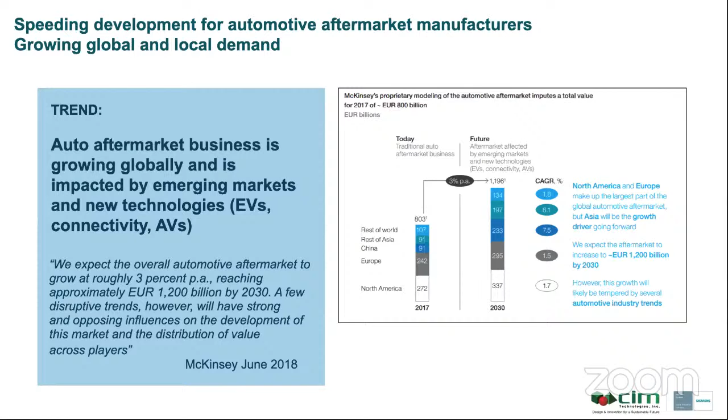The first trend we will discuss is the growing global and local demand for automotive aftermarket parts. The population of cars in use globally is growing, and the number of model types and average age is also growing. However, the profile varies significantly around the world, with China having a higher rate of growth and a lower average vehicle age, for example.

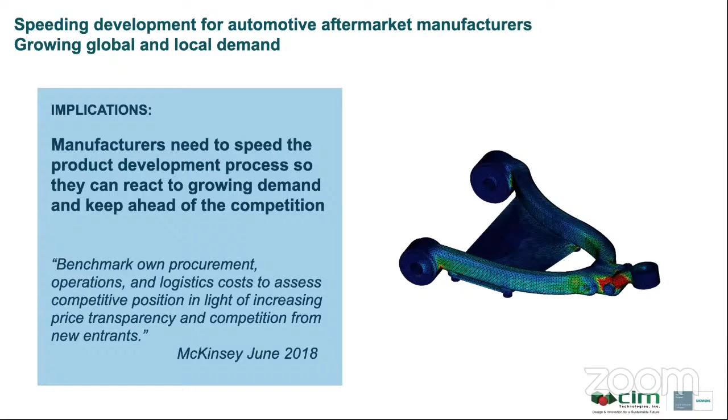One implication of this trend is that automotive aftermarket manufacturers will need to speed their product development process so they can react to growing demand and keep ahead of the competition. A possible solution for these manufacturers is to implement an integrated solution for product development that creates a digital twin of the product, adds data, and leverages this data throughout the product lifecycle. The digital twin can be used to optimize both the final product and the product development lifecycle.

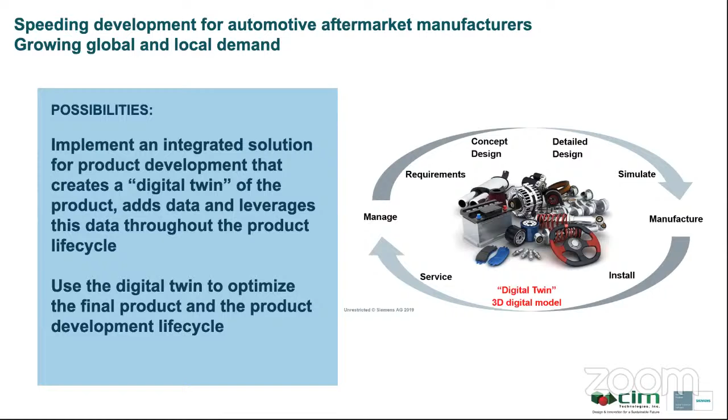The second trend that we will discuss is increasing demand for custom products that meet individual customer needs.

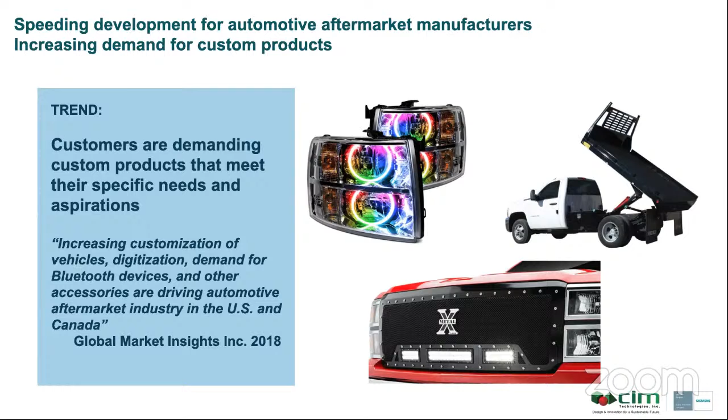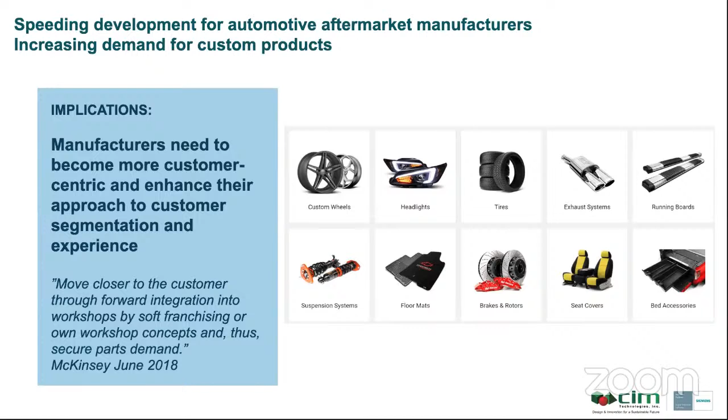An implication of this trend is that manufacturers need to become more customer centric and enhance their approach to customer segmentation and experience. A possible solution to this challenge is to develop a more flexible product development process that can easily create multiple options and variants of standard products.

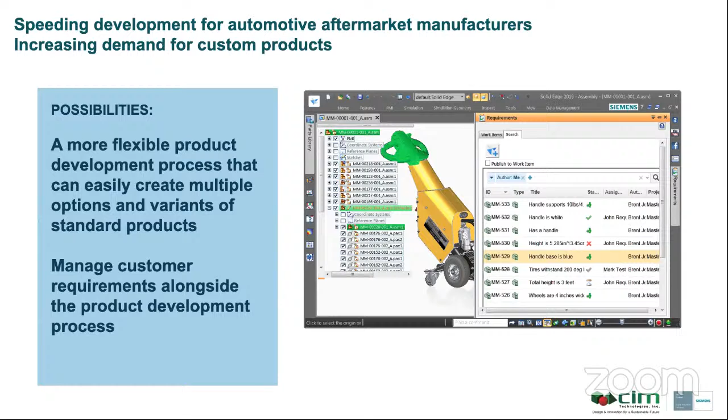Also, managing customer requirements alongside the product development process can help manufacturers react to customer demands more effectively. In addition, the ability to quickly create photorealistic renderings and animations of products to support sales and marketing becomes more important, together with the ability to supply data and product images to populate online catalogs.

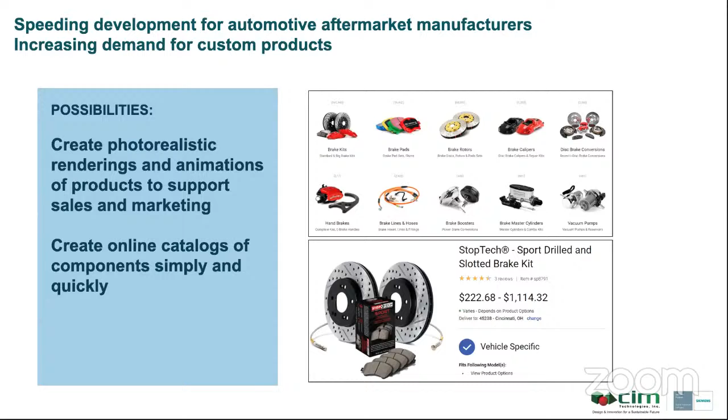Now let's go to the last trend.

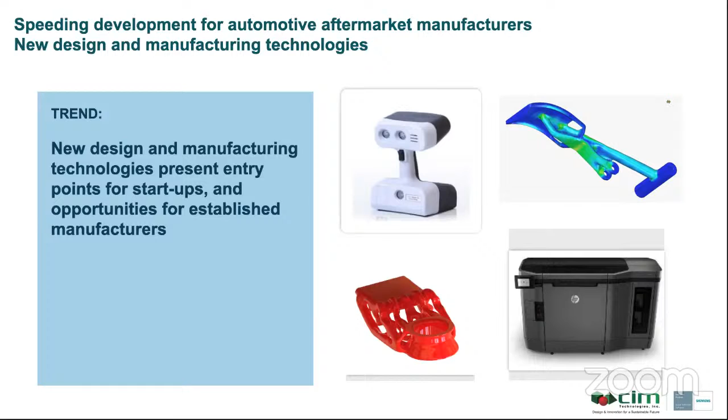An implication of this trend is that manufacturers need to be aware of the impact of new design and manufacturing technologies and move quickly to adopt them where most effective.

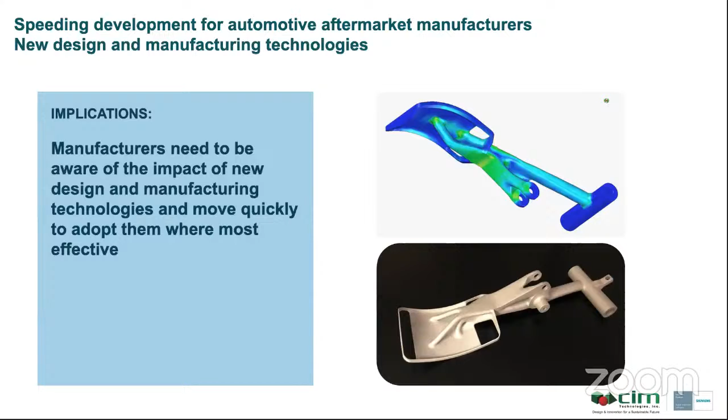Some possible solutions from these new technologies include the ability to scan existing components and vehicles and then use reverse engineering to create 3D CAD models of these components. This in turn can speed the design and increase the accuracy of replacement and add-on parts.

Another rapidly developing technology is the use of generative design. This applies computing power to the creation of optimized lightweight parts.

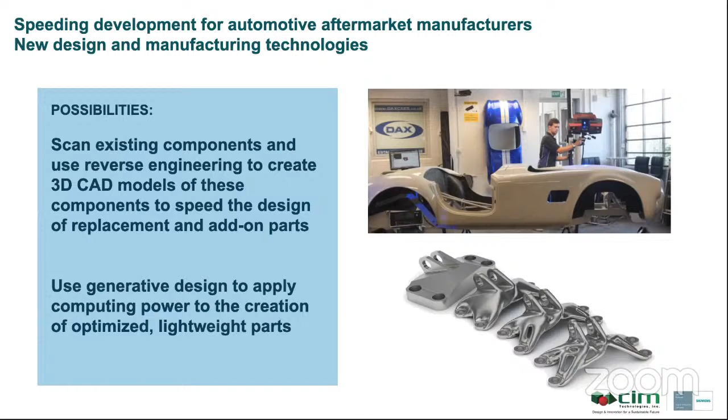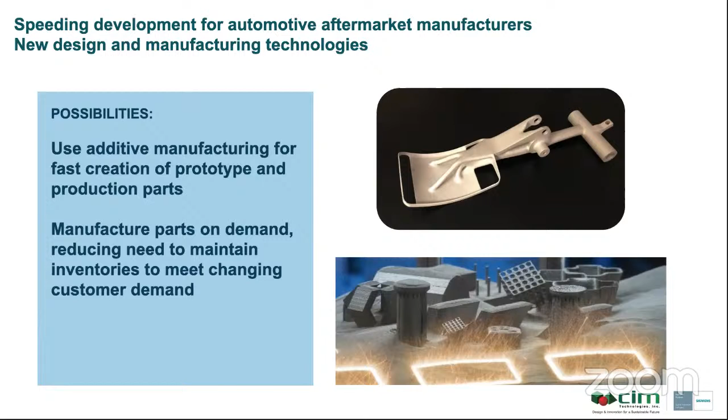More possibilities include the use of additive manufacturing for fast creation of prototype and production parts. This is a flexible manufacturing method that enables you to manufacture parts on demand, reducing the need to maintain inventories to meet changing customer demand.

We will now look in more detail at the key processes that manufacturers follow, from initial concept through to detailed design, manufacturing, installation, and service processes that, when optimized, enable you to bring new products to market faster and to deliver products with best-in-class performance characteristics.

We will also discuss the concept of a digital twin, the ability to create a detailed 3D digital model of your proposed product and use this as the basis for all areas of product development, including managing customer requirements, concept and detail design, prototyping, simulation, manufacturing, installation, and service.

You will see how the digital twin helps small and medium business manufacturers address the trends we discussed earlier.

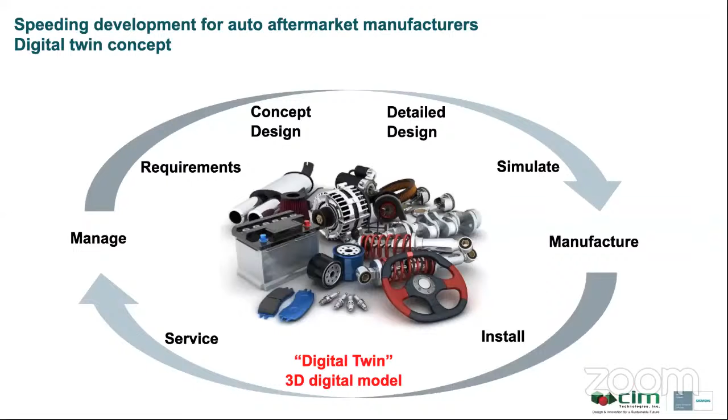Siemens is a leader in digital transformation for manufacturing components in different industries globally. Some of the largest manufacturing companies, such as Boeing, General Motors, and Siemens themselves, use Siemens software solutions.

But Siemens also has a portfolio of software solutions aimed specifically at meeting the needs of small and medium sized manufacturing companies. This is the Solid Edge portfolio. Small and medium sized manufacturers want fully featured professional engineering software, but they also need software that is easy to access and easy to learn.

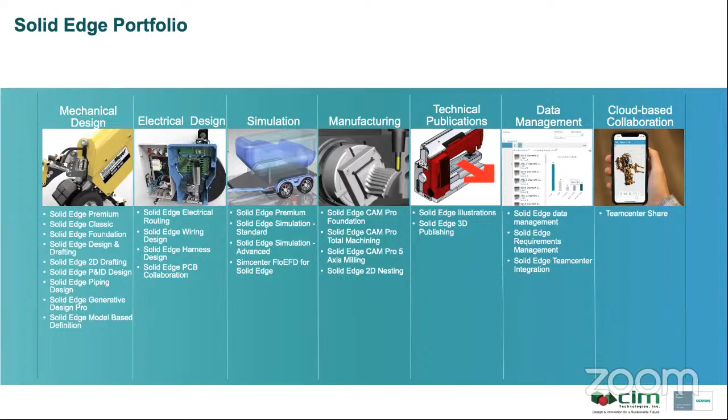Here are 12 key process areas that we see are critical to successful product development and ongoing customer satisfaction.

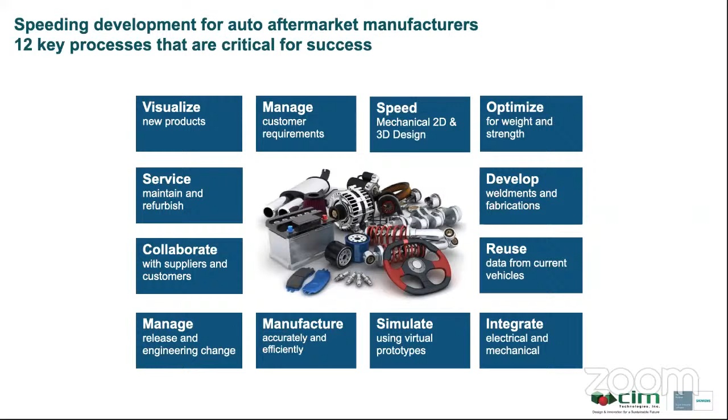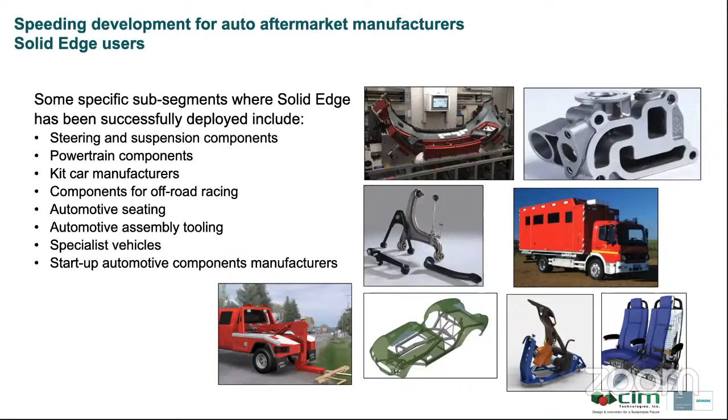The first key process is visualize new products for sales and marketing. So these are the challenges: auto aftermarket companies need to improve how they communicate their designs to potential customers, and sales need to communicate the unique value of innovative solutions.

So how can we help? Fast and easy creation of 3D digital models, photorealistic images, and animations. Benefits: clearly demonstrate new innovations and use of latest design technology, and create attractive marketing materials and catalogs easily and quickly. Solid Edge can do photorealistic renderings and animations, and mobile viewing apps for smartphone, tablet-based reviews.

Managing customer requirements. Challenges: customer requirements come from different sources and are supplied in different formats, and we need to ensure that customer requirements are visible and managed throughout the product development process. So how can we help?

Provide easy to use tools for capturing and displaying customer requirements, and link customer requirements to 3D CAD models. The benefits: reduce business risk by ensuring customer requirements are visible to all, track how and when requirements are met, and react faster and more accurately to changing customer demands.

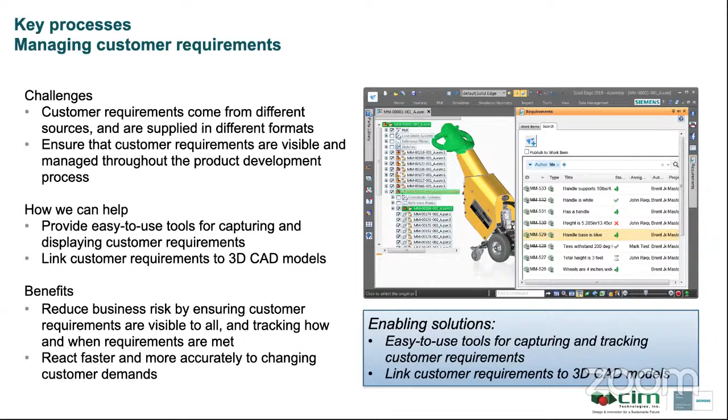Speed mechanical 3D design and 2D drawings. Challenges: produce accurate 3D part and assembly 3D models and 2D drawings. Designers and engineers are under pressure to work faster.

Solid Edge can create comprehensive, proven 3D CAD that makes design faster and more efficient. It also reduces design time and eliminates design errors before manufacture. With that, it speeds up design, makes changes faster, and increases reuse of existing components, delivering new products sooner and with lower business risk.

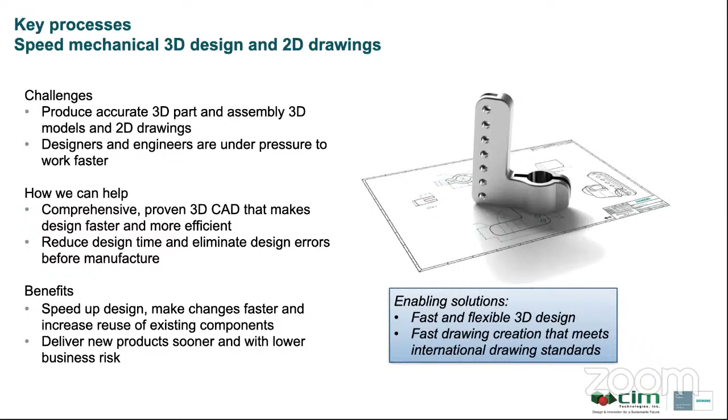Siemens have recently added a new technology for creating complex surfaces in Solid Edge called subdivision modeling. It's a great way to quickly create aesthetic, smooth forms. With subdivision modeling, you start with a basic mesh and then use a polygonal control cage to create your desired shape. You can subdivide surfaces and create finer meshes in specific areas to create specific features.

The great thing about this new capability is that it is included right inside Solid Edge. The surfaces and solids you create using this technology can be used in the downstream operations that Solid Edge supports, including photorealistic rendering, stress and fluid flow analysis, creating toolpaths for NC machine tools, and creating technical publications.

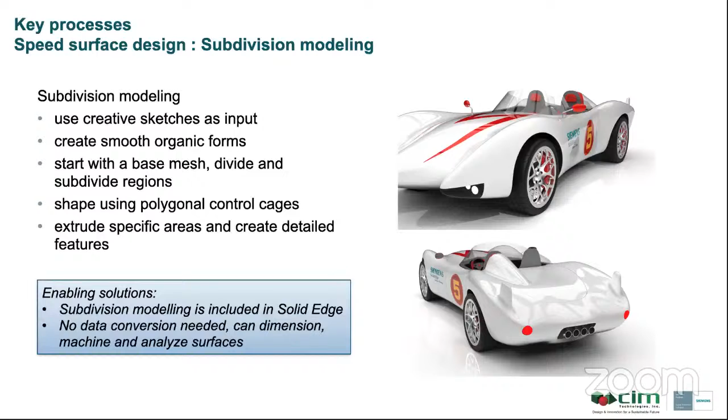One tool we have available to illustrate the benefits you can achieve using Solid Edge is the Solid Edge ROI calculator.

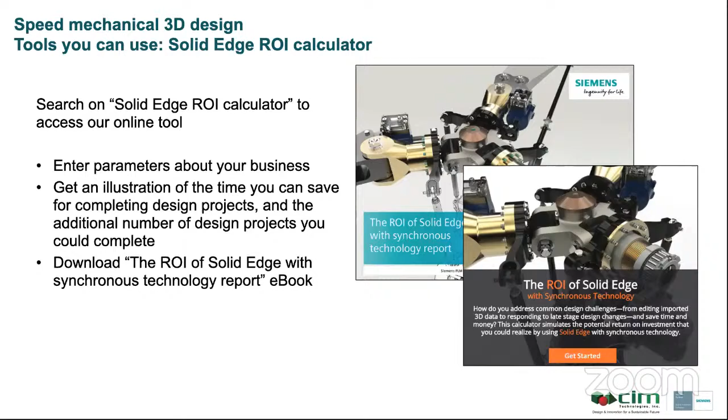The ROI of Solid Edge with synchronous technology reports 8 areas of benefits designed to support new products, re-engineering of existing products, reusing design detail, creating bills of materials, collaborating and mobility, creating, checking, and editing drawings, editing imported or supplier's models, and creating documentation.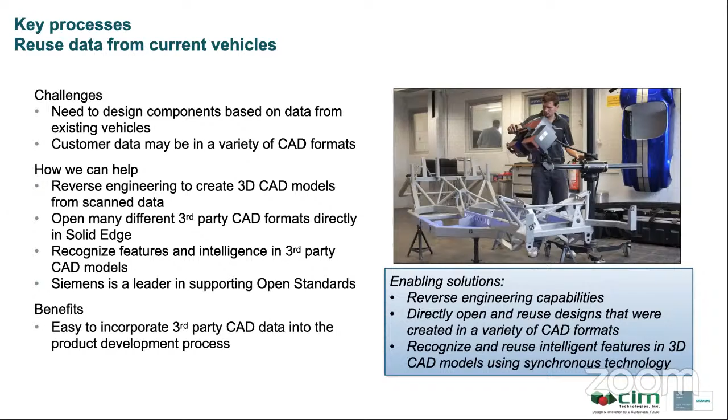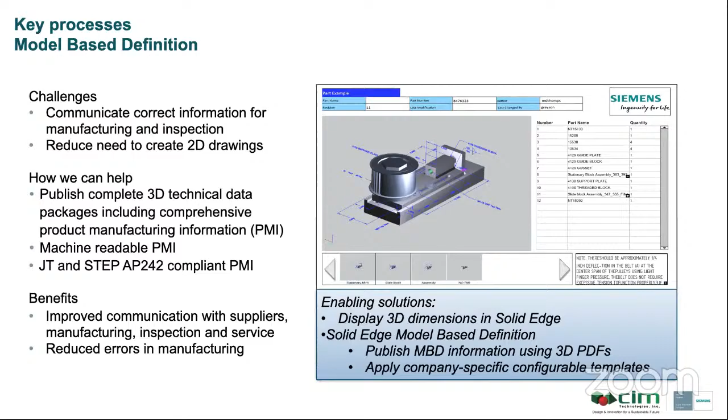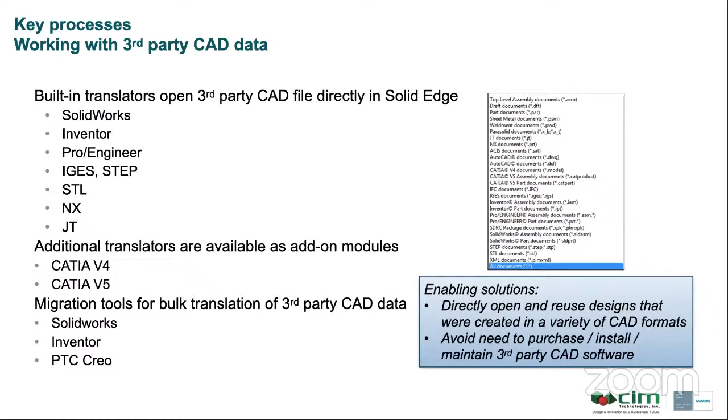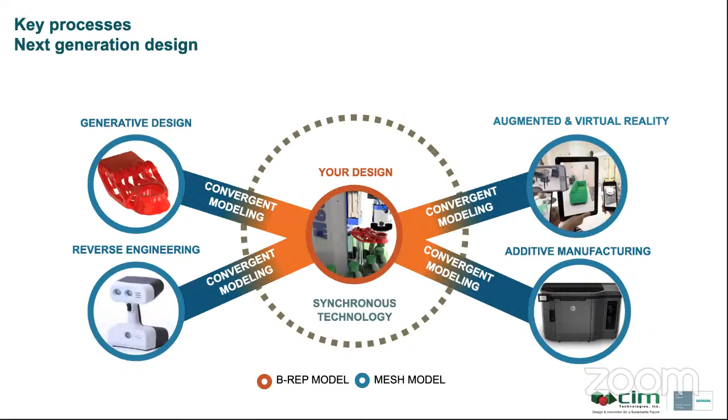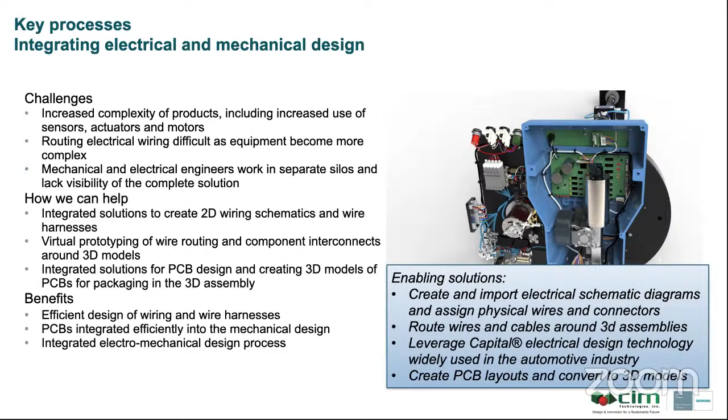The enabling solutions: create and import electric schematic diagrams and assign physical wires and connectors, route wires and cables around 3D assemblies, leverage Capital electrical design technology widely used in the automotive industry, and create PCB layouts and convert to 3D models.

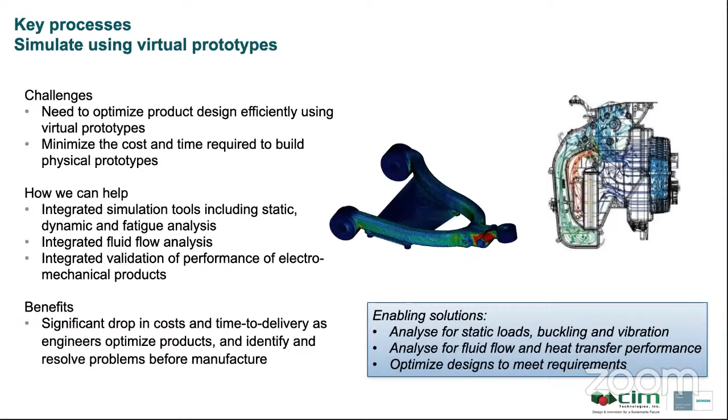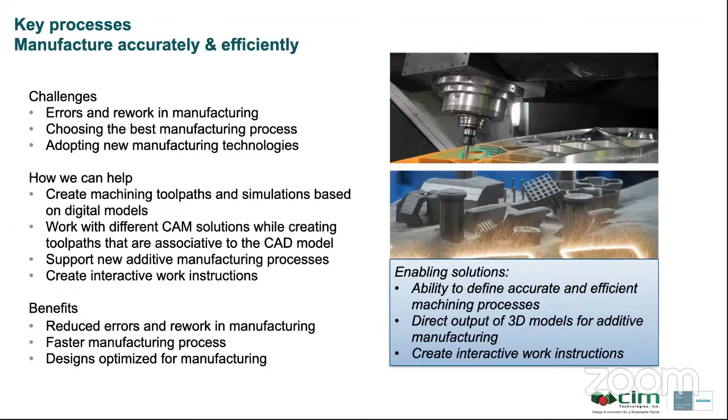Solid Edge has the ability to prepare parts for 3D printing. If you are fortunate enough to have your own 3D printer, you can directly print to it. If not, the design can easily be uploaded to the 3YOURMIND online service. The advantage of using the online service is the ability to not only choose the material for the part, but also the price point you are looking for. Either way, you have all the tools necessary to get the work done efficiently.

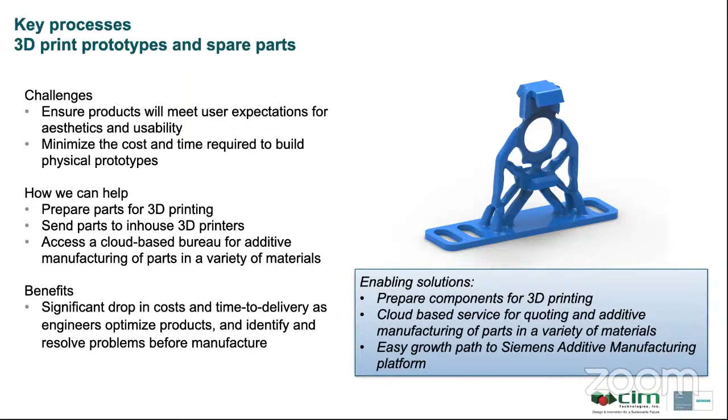The next key process is managing projects and engineering changes. Challenges: need to manage data that is created and consumed throughout the product lifecycle, manage engineering changes efficiently, and manage release to manufacturing. How can we help? Data management capabilities built into CAD with revision and release management capabilities. Product development teams can access and track design, analysis, and manufacturing data and processes. The benefits: fast and accurate completion of projects and engineering changes, speeds new product development and time to market.

Enabling solutions: scalable data and process management to match your company's requirements. Built-in data management capabilities are included in Solid Edge, with a growth path to Teamcenter, the PLM solution used by many automotive OEMs.

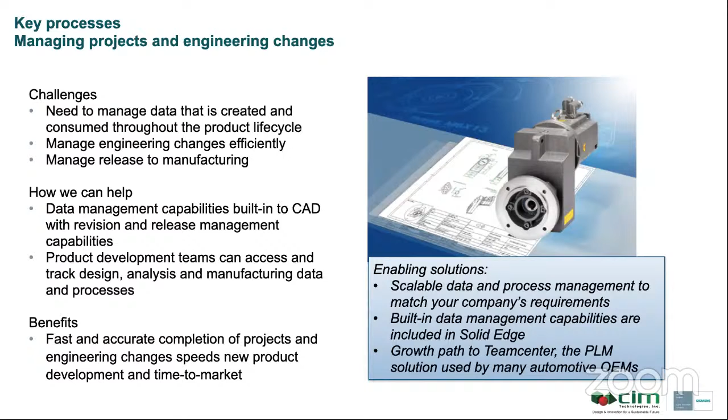Another of the key processes we will touch on today is collaboration with customers and suppliers. The ability to collaborate effectively is an increasingly important area today as traditional supply chains are under pressure from an uncertain environment around tariffs and from global health concerns. Manufacturers need easy methods to collaborate with customers and suppliers, both locally and globally.

Examples of collaboration can include working with a customer who is in a remote location to review the designs of a new component, or working with a tooling manufacturer to investigate an issue you have encountered in the manufacturing process. Siemens has easy to use cloud based collaboration tools that enable you to share design data that was created in many different CAD formats with customers and suppliers, and this can be done in a way that protects the intellectual property of your design.

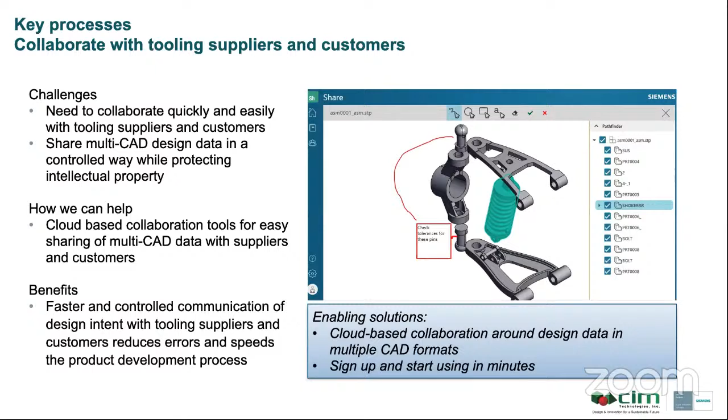So the last key process is maintain and refurbish. Challenges: ensure that products are installed and maintained correctly to ensure performance and reliability, communicate correct assembly process to shop floor operatives, and communicate design and options to prospective customers.

So how can we help? Create interactive 3D technical publications to clearly communicate the correct assembly process and that help end users install and service products correctly, and online catalogs that present products and options to prospective customers. So the benefits: product is manufactured, installed, and serviced correctly, ensuring it performs as designed, and increased revenue from online catalogs.

Enabling solutions: mobile viewing apps for easy access to 3D design information, create interactive service manuals, and create online parts and options catalogs.

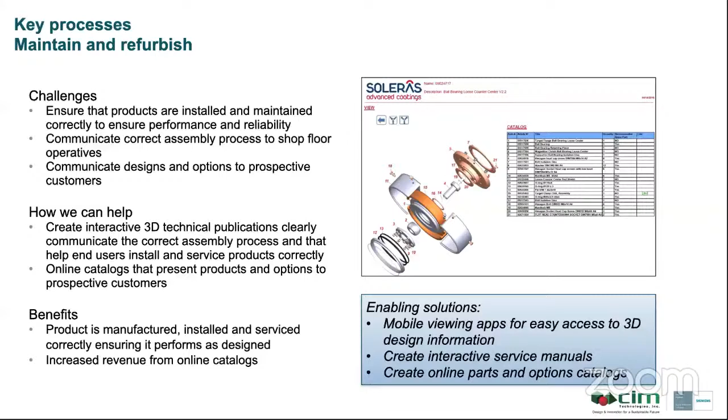Now, let's see some customer case studies and benefits achieved.

Here are some examples of the benefits achieved by automotive aftermarket and supply chain manufacturers. These include working quickly and flexibly to meet customer needs, utilizing new design and manufacturing technologies to engage with potential customers, and fast design of OEM and aftermarket products. Sheet metal modeling is now 75% faster, drawing creation is 25 to 50% faster, drawings for parts manuals are done 50% faster, they're able to machine highly complex designs, reduce machine programming time by up to 84%, and reduce component weight by 75%.

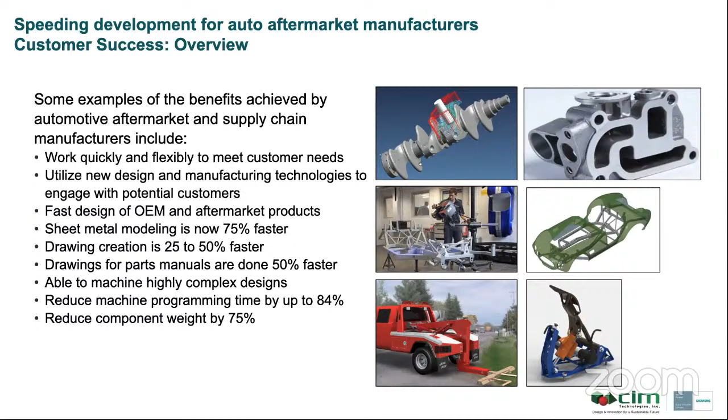OCAP branded ball joints and other steering and suspension system parts are sold in 174 countries for use in cars, tractors, trucks, vans, and other vehicles, as well as for hookups between ships and offshore oil platforms. The OCAP holding company controls OCAP Italia in Italy, focusing on original equipment manufacturers or OEM customers, with manufacturing sites in New Delhi, India, and Shanghai, China. From Jean-Jacques Tomas, engineering manager of OCAP: Solid Edge is more intuitive and faster than other CAD packages, so we use it extensively for aftermarket and OEM products.

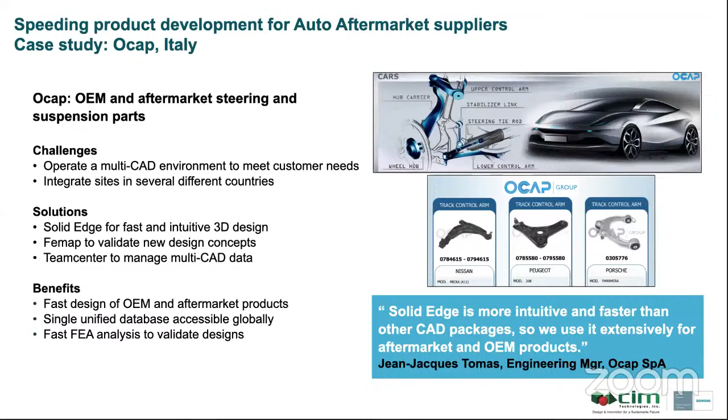Next is LCN Mecanica from Spain. LCN Mecanica supplies mechanical components to the automotive industry's international tier 1s and OEMs, such as engine parts, pump leads, brake systems, and seat brackets. The firm produces these parts using techniques such as stamping, machining, casting, fine blanking, and assembly. From Borja Fernandez of LCN Mecanica: now when the design of a part is modified, the effective communication between Solid Edge and CAM allows for the programming to be updated automatically without our intervention.

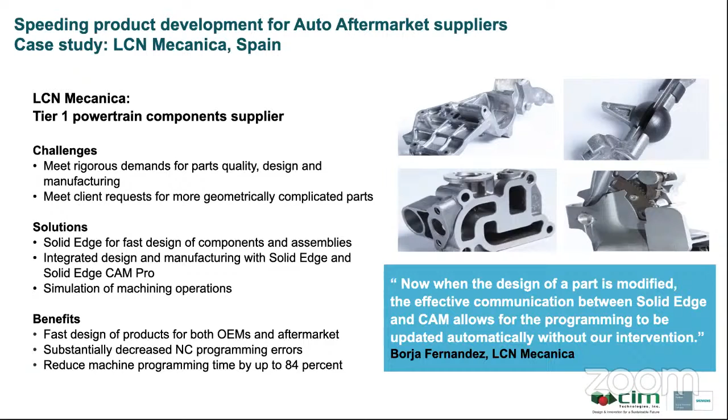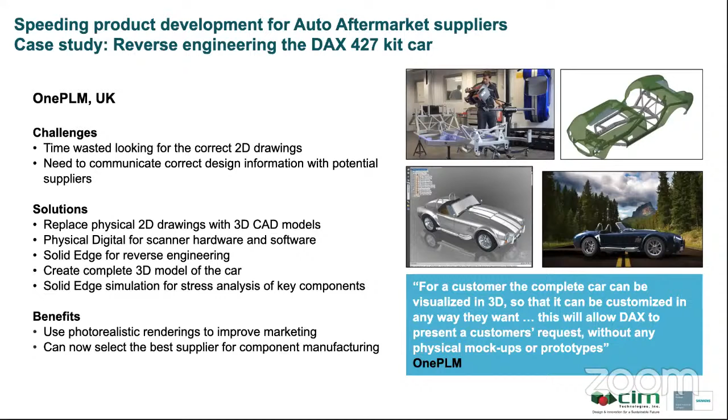Hall Designs, a startup manufacturer based in San Diego, California, designs and manufactures custom components for off-road racing. High design content with low production runs, and they use reverse engineering to integrate new components alongside existing designs. They have been a Solid Edge user since 2013. From Craig Hall, their owner: with Synchronous technology, I can import and edit vendors' files, adjust them, and make changes within seconds.

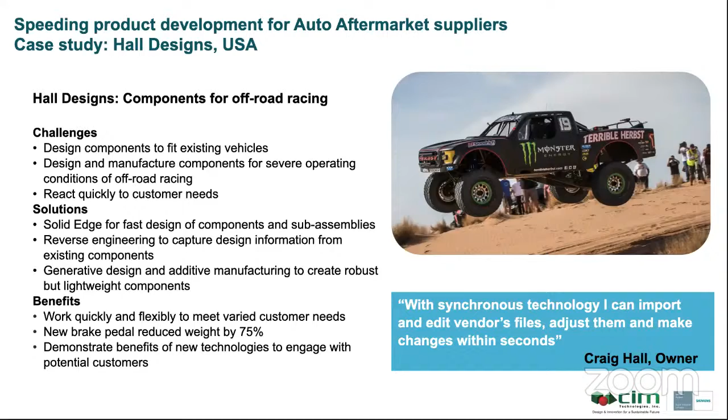Next is Freedman Seating, a specialty seating manufacturer that improved its design process while ensuring data compatibility with customers and suppliers. From Pasquale de Rico, engineering manager: we saw some nice advantages in Solid Edge for sheet metal and weldments design, as well as a more robust assembly design environment. We find its solid modeling functionality very friendly and best in class for us.

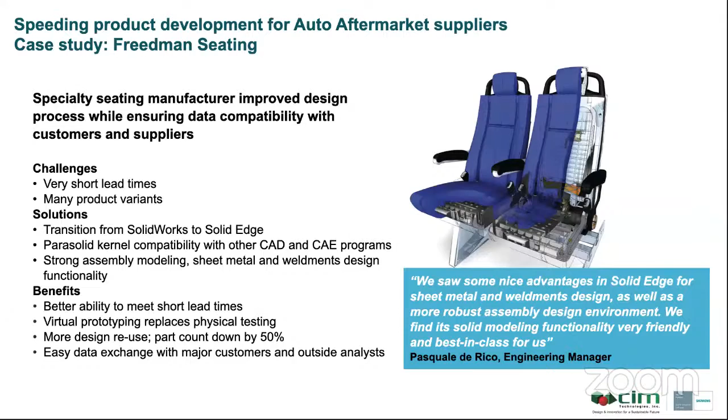So what have we seen?

Note that many of the large automotive OEMs are already using Siemens software for body and powertrain design, lifecycle collaboration, and digital manufacturing. For automotive aftermarket and supply chain companies using Solid Edge, this means that data exchange is very straightforward. Your product development is also future-proofed by using the same data standards used by automotive OEMs.

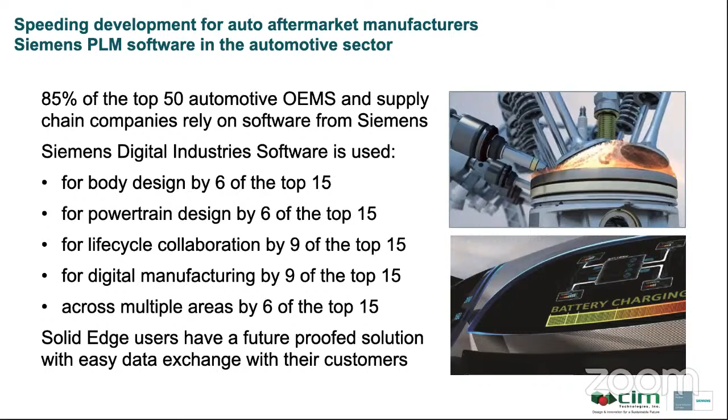The Solid Edge portfolio from Siemens Digital Industries Software enables automotive aftermarket and supply chain manufacturers to create a digital twin of their product, add intelligence to this, and reference it throughout the product development process, and move quickly towards becoming a digital enterprise.